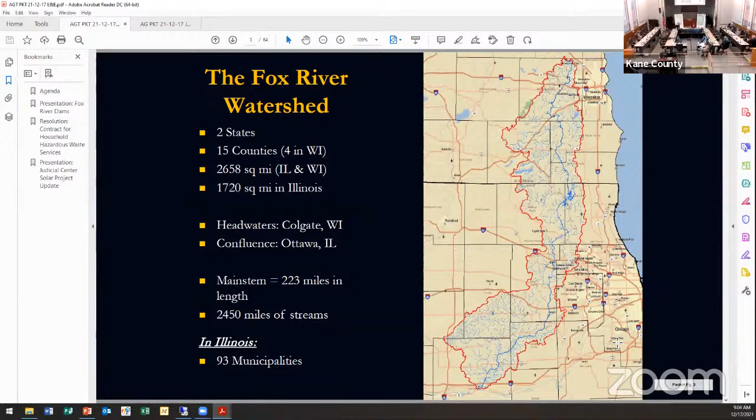When we talk about the people in the watershed, there's a vast amount of jurisdictions that span across the watershed. We have 93 municipalities just within Illinois alone. Is there another Fox River in Wisconsin? There is, up by Green Bay. We don't like to talk about it.

Appleton, that's up by Appleton. That's correct, and it drains up north through Green Bay.

So our Fox River here drains south from Colgate, Wisconsin, just west or northwest of the Milwaukee area, down about 200 miles through Illinois, and has its confluence with the Illinois River just upstream of Starved Rock down in Ottawa.

When we talk about the river and its dams, it's important to understand some of the history. If we zoom in on Kane County, in the late 1830s, early settlers and pioneers making their way westward from Chicago toward Galena and the Mississippi River had to cross the Fox River Valley.

Many people noted the great conditions of this steep, gravelly, bedrock-lined river and the abundant timber along the Fox River Valley, and noted it would be a perfect place to set up shop, to construct sawmills and other operations.

The county quickly grew. As you can see, in 1840 the population was about 6,500. Now on the map on the right, the little black dots along the river itself are the dams that were constructed early on by those early settlers.

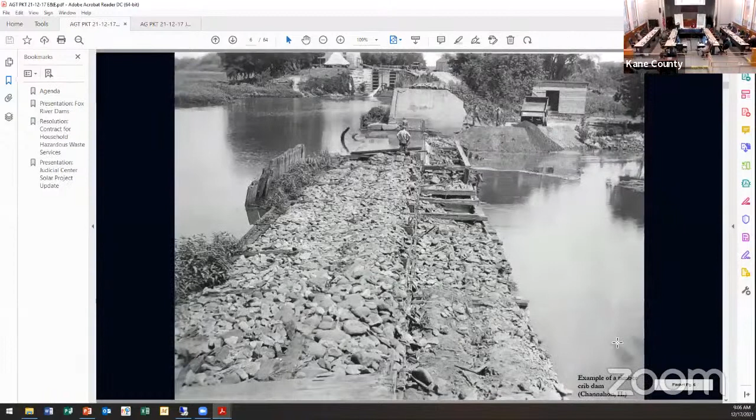Those early dams were constructed from timber and stone cribbing. This is an example of what they would have looked like. These dams were frequently washed out.

The early ones that were put in, if you look at Kane County's history, there are many notes of dams being constructed and then washed out by what they refer to as a spring freshet. So early on, the dams were continually maintained and rebuilt, constructed upstream and downstream of the former site when one was washed out from one year to the next.

But then, when the railroads came through in 1849, that really put the development into overdrive. With that, the population grew, and there was a lot more industry along the rivers. The dams themselves, as technology increased, were reconstructed.

Instead of using timber crib construction, they were built with things like concrete, and that's what we see on all of the dams that we have today.

The Fox River itself was utilized for a number of things besides mechanical water power to grind flour, for sawmills, and things like that.

The Fox River, interestingly enough, was one of the primary sources of ice for the city of Chicago in the late 1800s. About 120,000 tons could be stored up in the Elgin ice houses alone, in addition to ones upstream and downstream.

There's a picture of one — I couldn't find one for Elgin, but I did find one picture of an ice house down in Oswego, so it gives you an idea of what those might have looked like.

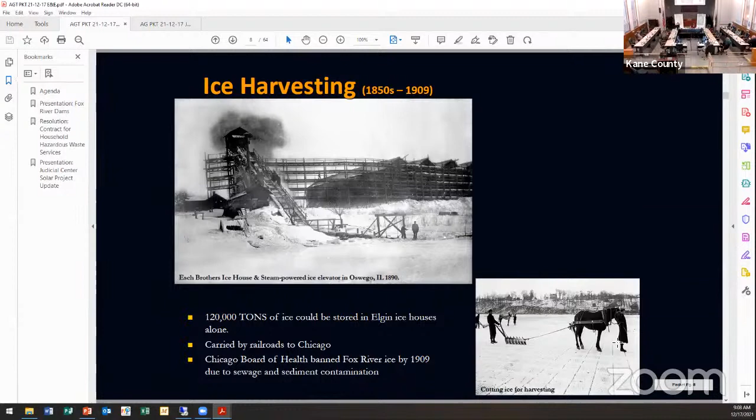Another interesting part of Fox River history is that before the advent of plastics, mussels were harvested out of the Fox River, particularly in the southern part, and used for buttons. Many industries opened up in the south part of the river, and they would harvest these mussels by taking john boats out, dragging lines across the mussels. As the mussels closed up, they'd pull them in, then run them through a machine that would punch holes in them.

I actually have one here after the meeting if anybody wants to see one. They're kind of hard to find, but if you look in the right place in the Fox River Watershed, particularly down in the Yorkville area, you'll actually find a couple of these. So they're kind of interesting.

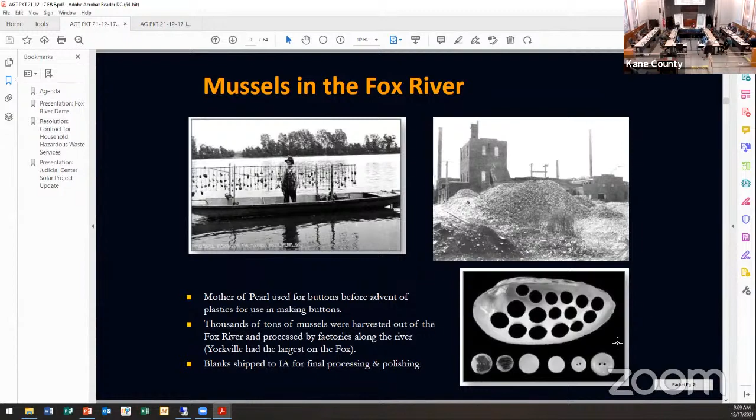So again, it was another industry that sprang up and utilized the Fox River during that time period. As time went on, we had better products, plastics came in, and that was no longer used. So it's kind of an ongoing theme.

We had all of this development occurring along the Fox River from the late 1800s through the 1930s. It wasn't until 1899 that the Rivers and Harbors Act was passed, the first federal legislation that put laws in place. Prior to that, people could just go out—if a landowner next to the river wanted to build a dam, he just built one. If he wanted to fill in part of the river for better access, he just did it. In 1899 that changed; federal laws were established.

With the added development and increased population, there were no standards for water pollution. It wasn't until the 1920s that people noticed the condition of the river was so bad that they started building wastewater treatment plants. That's when many of our treatment plants up and down the Fox River were constructed. You can see some other notes there.

PCBs were used as electricity became more prevalent in the area. PCBs were used in that process with the transformers, and that became a pollutant discharged into the river. We still deal with PCBs today in some of the sediments.

The first water pollution legislation was in 1948. Then everybody's familiar with the 1972 Clean Water Act, those amendments made to the Federal Water Pollution Control Act to further clean up the river. What we saw in the Fox River was that water quality was very poor up until the Clean Water Act, and then it got dramatically better.

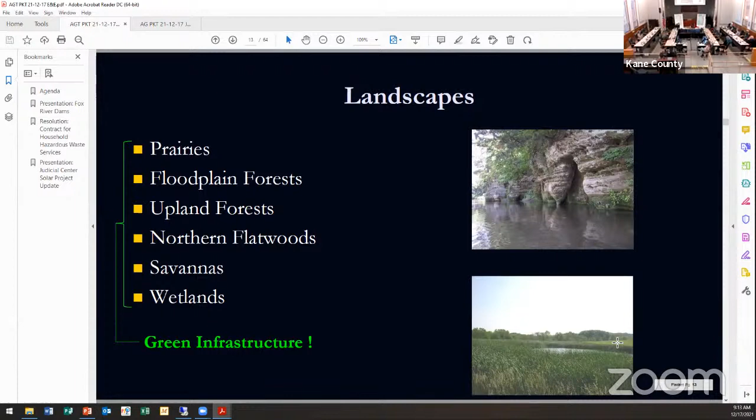As all of you are aware, the county has a green infrastructure plan that recognizes green infrastructure as the interconnected network of these natural areas, which really provides the reserve for our county's biodiversity. It's a really important land asset that we need to actively manage. So is 12% a good number or not good enough?

Well, it's very low, but it's just a consequence of how the county in northern Illinois was settled and converted from wetland and prairie landscape to agricultural production. So I think what it highlights is that it's very important that we protect the natural resources, those features that we have left.

For example, in Kane County, we have about 3,600 acres of wetlands left in the county. That's out of the county itself, which is 335,000 acres. So that's about 1%. Only about 1% of the county is wetlands.

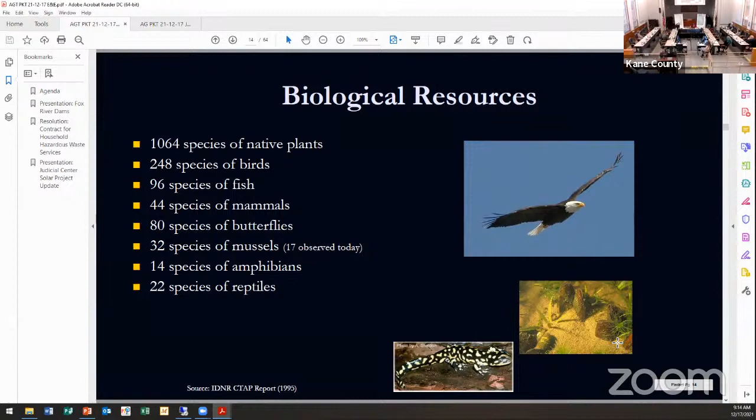And so when we talk about these biological resources, 1,000 species of native plants, 250 species of birds, almost 100 species of fish, et cetera, the majority of these flora and fauna rely on that 12% of the remaining natural areas that we have. And of course, within there, we have a number of state threatened and endangered species.

And so those are something that we use in order to try to take extra caution in protecting those remaining wetlands and the rivers and streams.

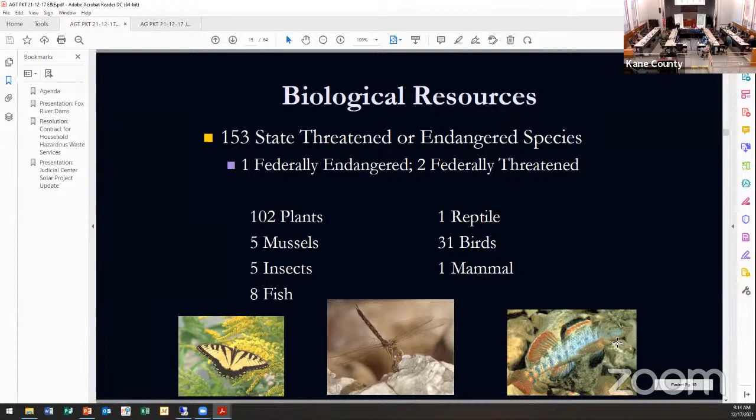So which one is federally endangered? The turtle? I knew you were going to ask me that. Blanding's turtle. Eastern prairie fringed orchid is one of the federally protected plants. There's only a few that are at the federal level. There's many state ones, and I don't have those offhand. Okay, all right, thank you.

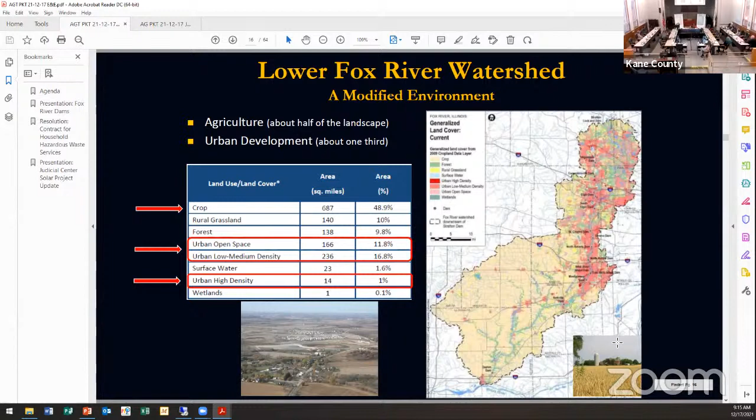So we talked about the 12% of the watershed that is remaining in those natural areas. About 50% of the watershed is agricultural row crops, and then about a third of the watershed is urban development. So those would be our subdivisions, our strip malls, our downtown areas, et cetera.

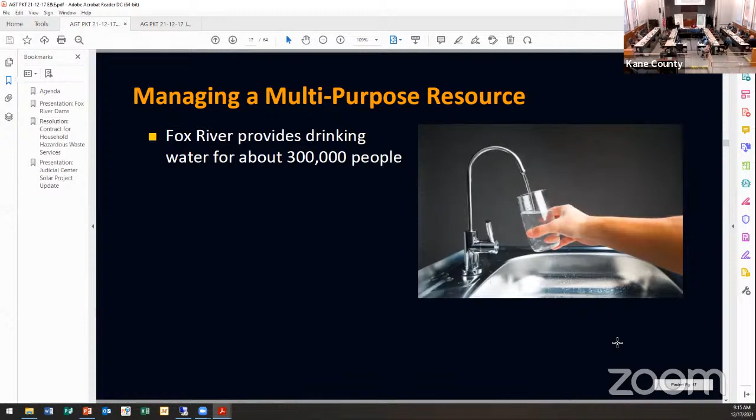And with that development and the people that live in those areas, we rely on the Fox River to provide a number of services for us. I think the first thing that comes to mind is that the Fox River provides drinking water for a little more than 300,000 people. City of Elgin and City of Aurora take their drinking water, a large portion of it, from the Fox River. And so they rely on the clean water in the river for their water supplies.

Likewise, all of the people in the watershed discharge their stormwater. When it rains, the water washes off their landscape, goes into the ditches and swales, and then ultimately into the tributaries, and finally into the Fox River. So we rely on the Fox River to carry, assimilate, and treat our stormwater.

Likewise, all of the wastewater that's discharged from all of our municipal treatment plants is discharged into the Fox River. And you can see some of the numbers there. When you look at the total number of permitted discharges, there's about 160 permitted discharges that the IEPA has issued a permit to discharge some amount of water into the Fox River.

When you add all of that up and you look at what the projected base flow is in the Fox River under low flow conditions, the amount of water that is allowed to be technically discharged into the river actually exceeds the low flow natural flow in the river.

So what that tells us is that when we get to extreme low flow conditions in the Fox River, the vast majority of that flow is actually made up of treated discharges coming from further upstream in the watershed. So how we treat that wastewater discharged into the river becomes very, very important.

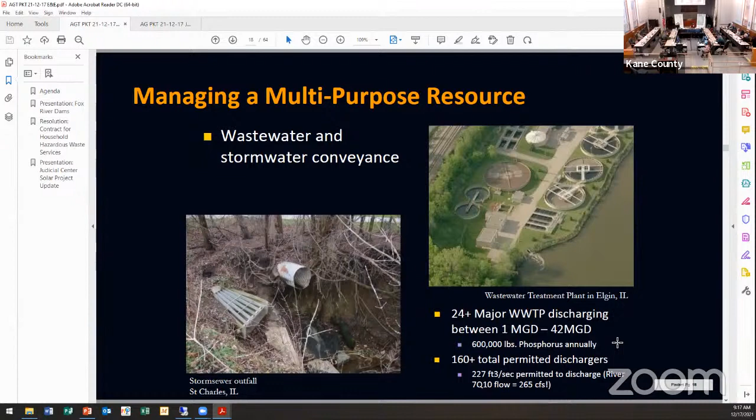Rob, Madam Chair, could I ask a question? Please. I had been told at one time that during extreme low flow, the amount of effluent in the river is about 82% of what's actually in the river. Is that an accurate number?

It's probably not far off. Again, part of it gets back to what's permitted to discharge versus what's actually discharged. So if you think about it, during a drought condition, the treatment plants have a permit and they're allowed to discharge at a certain level, but under drought conditions, they're discharging much lower than that. So that number is probably not too far off. I don't know if anybody's actually crunched the hard numbers, but it does present a challenge. We'll get to how those things play into how the river's been managed in terms of the dam. So that definitely plays into that.

In addition to that, follow up if I might, Madam Chair. Yes, please. I wanted to ask about the opposite situation. I know in Chicago, oftentimes, at least in the past, if there were heavy rains and so forth, they would have to reverse the flow of the Chicago River.

And when stuff got into Lake Michigan, they would close the beaches.

If we've got a spring freshet or a heavy summer rain, does that result in telling the people who have permitted discharge that they have to reduce it? Or how does that affect Elgin or the drinking water if there's too much of the wrong kind of water flowing in?

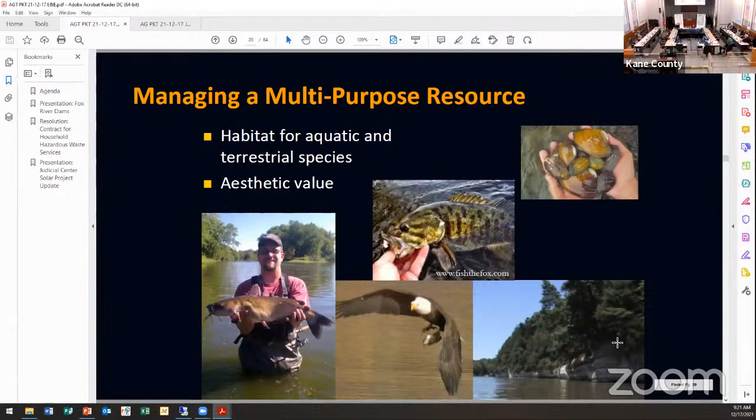Again, we're asking the Fox River to meet a lot of demands with our drinking water withdrawals, our wastewater discharges, our stormwater discharges, all while asking it to be a viable source for the remaining biodiversity that we have in the watershed. So these are just a couple of pictures to remind everybody of the valuable resources that we do have within the Fox River itself.

And things are changing. In the Fox River, the population is projected to continue to increase. We know that there's over 1.25 million people in the watershed, including the area up in Wisconsin, and we think that's quickly going to reach 1.5 million people. With all of those people living and working in the watershed and utilizing the river, whether for stormwater or wastewater, those are challenges we're going to have to work hard on in order to maintain the level of quality in the river.

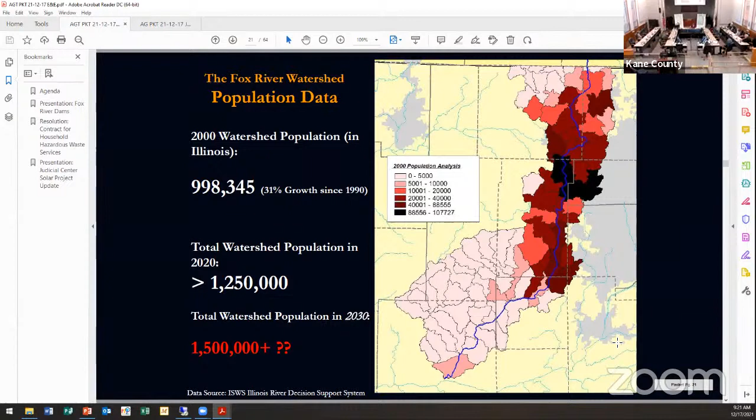So the state of Illinois, through the IEPA, as set forth by the Clean Water Act, has to prepare a report every other year called the 305(b) report. They look at the conditions in the Fox River and assess whether it's meeting the standards. If it doesn't meet the standards, they put out what's called a 303(d) list, which lists the impairments, or essentially the problems, with the individual stream or river systems.

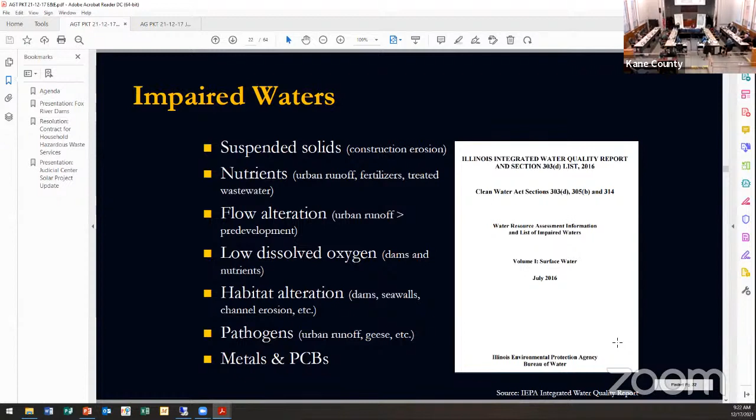Some of the active impairments that we're actively trying to address right now, or focusing on, would be nutrients and low dissolved oxygen.

When they go out and do their sampling, they look at the water quality, the macroinvertebrates—the little bugs that live in the river system—and sample the fish, putting together this composite assessment to identify what they believe the problems are. The low dissolved oxygen, caused by excess nutrients in the river system, always tends to come to the top of the list as one of the primary problems.

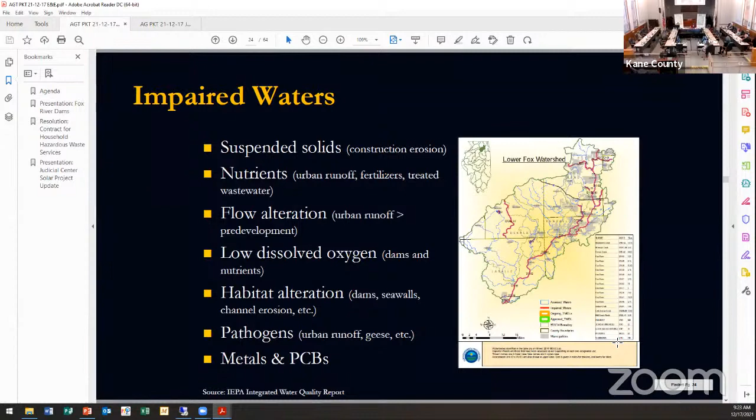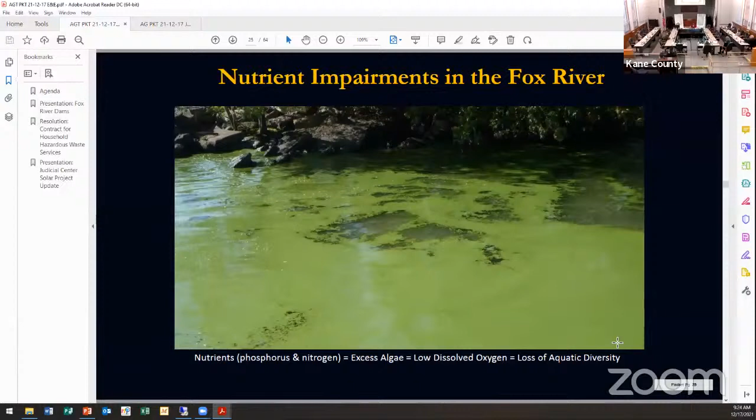These nutrients are discharged into the river 24/7 from wastewater treatment plants, as well as what washes off periodically during storm events. When those nutrients wash into the river system, the algae gives off oxygen during the day when the sun is shining, but when the sun goes down, they're respiring and consuming oxygen. They can actually pull oxygen out of the water, which stresses the fish and macroinvertebrates.

That 47%, nearly half of the river, is in an impounded condition rather than free-flowing. And when you look at the surface area from an aerial map, about 55% of the area of the river is actually within these dam impoundments. That has a significant impact on the water quality in the Fox River.

So focusing in a bit more on the dams: below the dams we have free-flowing segments with high biodiversity because of variability in velocity and depth. Since the water moves swiftly around cobbles and gravels, we get higher dissolved oxygen. The nutrients in the stream system are distributed across the entire bottom of the river, and with higher biodiversity—diatoms, bacteria, macroinvertebrates, all the little bugs living in the river—they do a pretty good job of consuming and assimilating those nutrients.

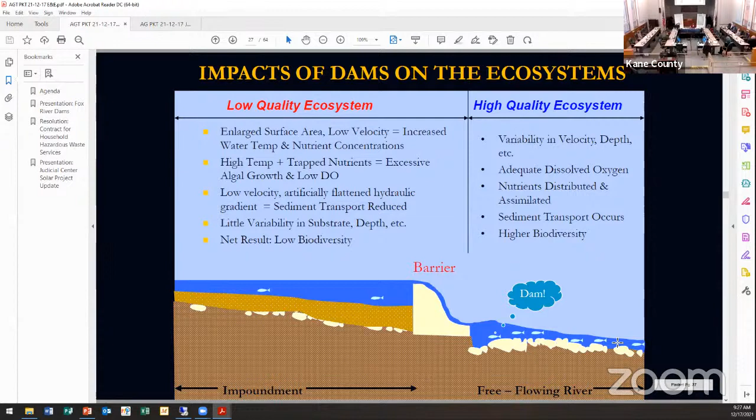So we know that they definitely have an impact on the ecosystem, but we also know that they have an impact on the water quality. If we think about it, it makes sense - we said that 50-55% of the entire river from north to south is in this impounded condition. It should be no surprise that creates significant challenges in trying to meet the water quality standards, basically trying to keep that dissolved oxygen high enough to support the diversity in the river.

In addition to those chemical and biological impacts of the dams, everybody's probably aware of the safety challenges we have with the dams in terms of public safety. That's because the dams themselves were constructed by people like me a long time ago, people like Jody, engineers. We want to be very efficient in how we're going to discharge that water. They designed those so that they wouldn't scour out below the dam and cause the dam to fail.

So they constructed these stilling basins below the dams. You may have heard them referred to as a roller, and essentially it's a way to dissipate the energy there. It's very efficient at dissipating the energy, but the problem is they create a keeper system that if anybody gets near that, they could get sucked into it, and it usually ends in a fatality.

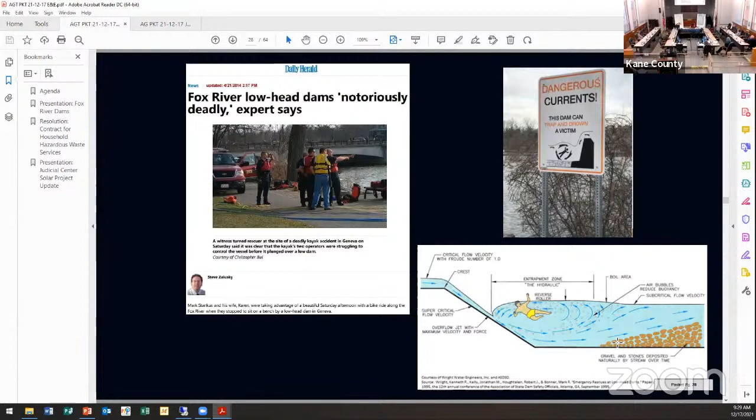We've had a number of fatalities, thankfully none recently that I'm aware of here in the Fox River. There's been a number of fatalities on the Kankakee River in Wilmington, for example. We had some fatalities many years ago in Yorkville, and that drove the process to retrofitting the dam there. So besides the water quality and biological impacts of the dam, public safety is certainly something else that needs to be considered.

So just a couple of slides - we talk about all of these different problems, and of course there's never a simple answer as to why these things happened. Likewise, there's never a simple answer that there's a one size fits all - we should just do this and everything would be fine. Everybody tends to work in their own silo in their own area, and the challenge is that if we're not really talking with one another and coordinating, collaborating, we can have these larger problems that manifest, such as what we see in the Fox River with the ongoing water quality issues.

The good news is that we've kind of gotten out of those silos of late, and people have been working together. So we're going to talk about that.

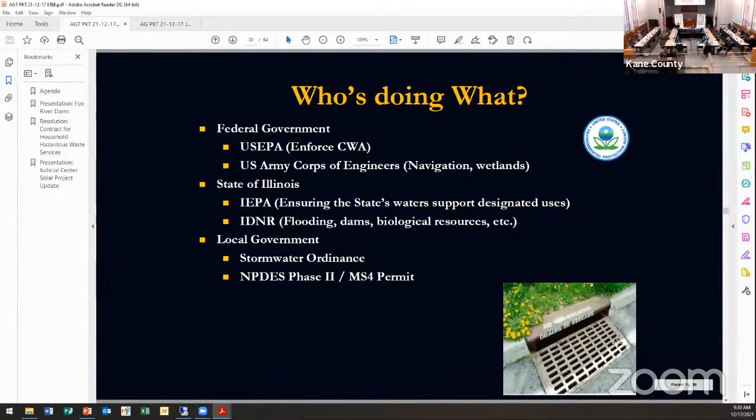Of course, there's a number of agencies that are working on these issues. Again, this is where we have a challenge - we want to make sure everybody's not just working within their own silo between the EPA and the Army Corps of Engineers. We're looking at the Clean Water Act versus wetlands, the IDNR on dams and flooding, local governments like Kane County or municipalities looking at their stormwater ordinance, and the NPDES looking at the water quality aspects of stormwater. We need to make sure everybody's working together.

So moving forward and the future of the Fox River - we really are at a crossroads here. I think the county's done an excellent job trying to forecast out and get ahead of some of these things. For example, the county's stormwater management ordinance and the aspects put in place there to keep the rainwater as close to where it falls as we can, preserving the green infrastructure - those remaining wetlands and things like that - promoting water quality BMPs to clean that water.

So we call that site scale green infrastructure - those best management practices that we're asking folks that are developing to construct, to infiltrate and clean their water. Then when we think about the bigger picture in terms of the Fox River, it's important to look at what improvements can be made to the water quality of the point source discharges, as well as looking again at the dams themselves and recognizing the impacts they have on the river itself.

Working together with multiple jurisdictions, multiple agencies, we're able to move that process forward. One of those aspects is this group called the Fox River Study Group, of which Kane County is a board member. It's existed for about 20 years.

The Fox River Study Group has been looking at what the problems are within the Fox River and what can be done to address those, and where we can get the most bang for our buck. There was an interim report published in 2015, and we have a new report that's going to be submitted to the IEPA in December 2022. Our findings so far have shown there's a combination of recommendations and improvements that need to be made.

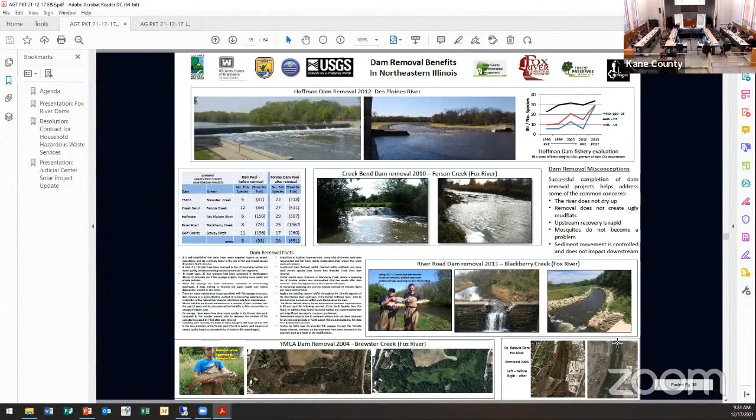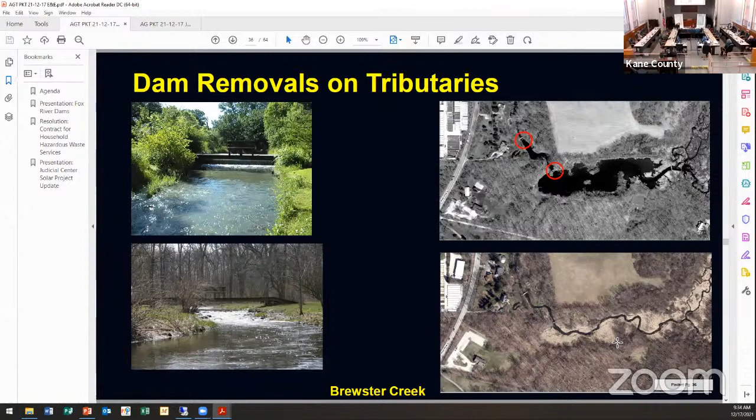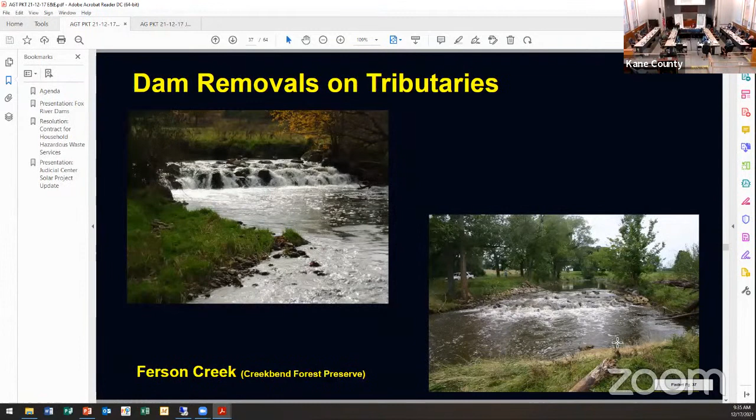But we've had several dams removed on the tributaries of the Fox River, particularly here in Kane County. For example, Kane County Forest Preserve worked on removal of the dam at Camp Tu-Endie-Wei on Brewster Creek. There's been a dam removal at Creek Bend Forest Preserve on Ferson Creek. A couple of smaller dams were removed on Tyler Creek - one was up in Judson University, and another smaller one was removed in Wing Park up in the city of Elgin.

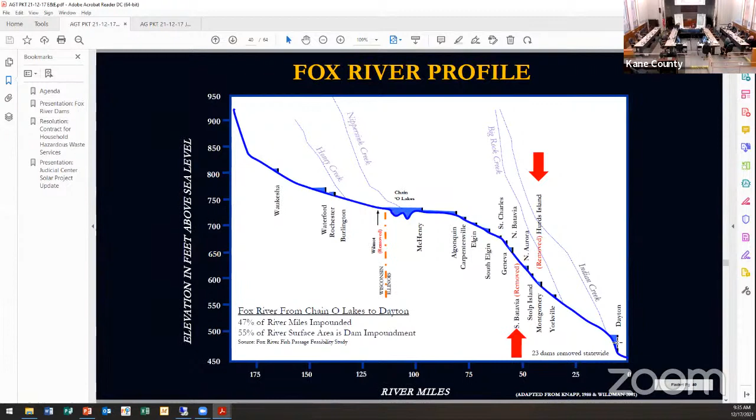So the South Batavia Dam was removed in 2005 by the Kane County Forest Preserve - that was about a $1.5 million project. You can see the before and after; there's really not a lot of changes, but if you look at the aerials on the right, the spillways were removed. This dam was interesting in the sense that it was actually constructed even though the Rivers and Harbors Act of 1899 existed - it was built in the very early 1900s.

There was a powerhouse located where Funway was, and that powerhouse provided the electrical energy for the old interurban line there. As the story goes, one summer the river was so low that the powerhouse didn't have enough cooling water, so they had to shut their generators down.

And some of the dignitaries on the 4th of July were stuck on this interurban line and were not very happy. Lo and behold, the very next year, the dam was constructed adjacent to the powerhouse so that the water level would never be too low. So it's kind of interesting, things were done a little quickly back then. But of course, once the interurban line shut down, the dam became derelict and didn't serve any purpose. That's why the Forest Preserve looked at removing it in 2005.

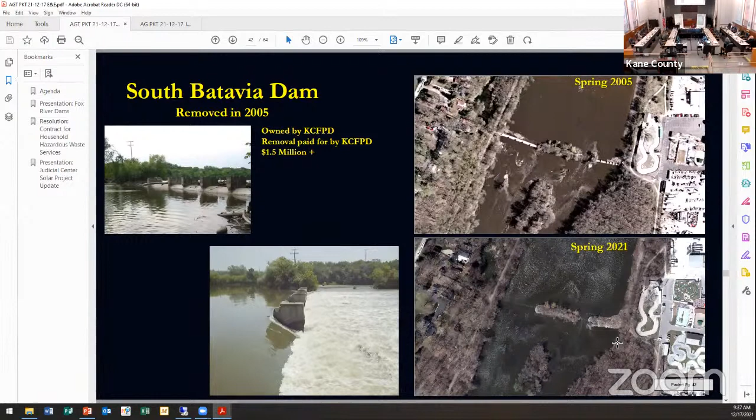Likewise, the North Avenue Dam at the south end of Aurora was removed in 2006 by the city of Aurora. Interestingly, that dam was actually constructed in the 1950s, I believe. And the sole purpose of that dam—there was no historical dam there for like a mill or anything.

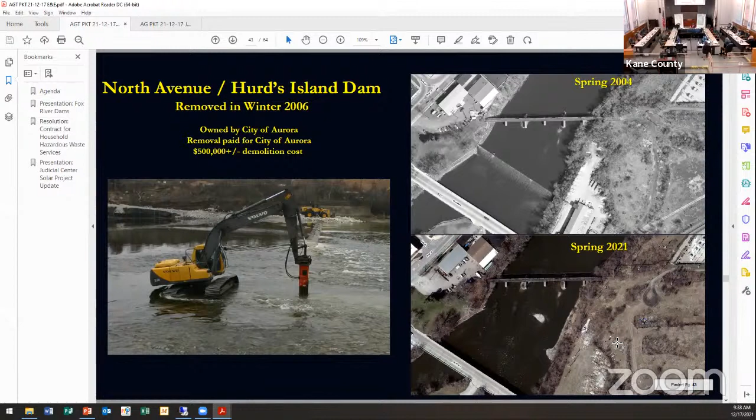Records are sketchy, but the story is that we all know the city of Aurora had combined sewer overflow. So when it would rain, the sewers would overflow and go into the river, creating a rather noxious condition during certain times of the year, with things hung up on the sides of the riverbanks. It became such an issue that in the 1950s they decided to build a dam to raise the water level, to drown out those areas and keep things flowing through. With improvements in treatment and reduction in combined sewer overflows, the dam wasn't needed anymore, so the city of Aurora removed it in 2006.

The Yorkville Dam was a dam modification project done by the Illinois Department of Natural Resources. This project was about a $7 million project. They wanted to address the safety aspect of the dam itself, so they removed the dam and built a step dam in its place.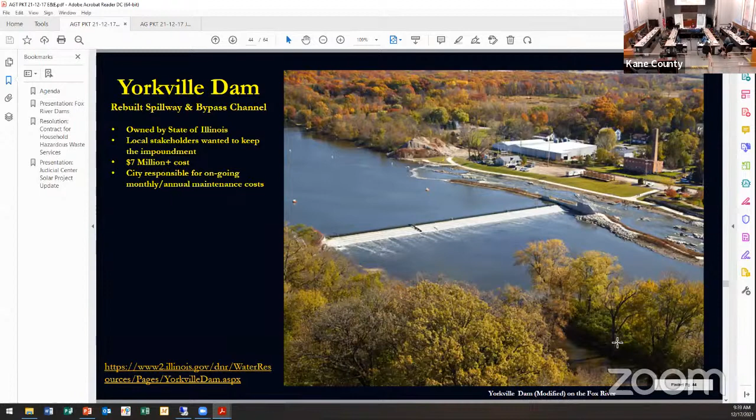The city of Yorkville's constituents were very adamant that they didn't want to lose their dam impoundment, so they opted to build this whitewater bypass channel, shown on the right side of that photo. This is an option, although the interesting thing is, if you recall the slide that showed no fish on the dam side and all the fish and diversity on the other side—dam modification projects don't address any of the water quality issues, and they address very few of the biological issues in terms of fish passage and biodiversity.

Excuse me, Wallace with the question. Yes—I know St. Charles has proposed a similar dam to what Yorkville had. They're taking out the dam and putting in a step sort of dam for recreational whitewater use. Have you looked at that project, and do you know if it's going forward and what the impact would be? Yes, I actually have slides on that. Okay, I can skip through. No, that's okay—let me go through a couple other ones, then we'll touch on that, and I know I need to turn this over.

I think everybody's familiar with the Kane County Forest Preserve project to remove the Carpenter Dam up in Carpentersville. That project is ongoing, about a $1.5 million project, slated for removal in the fall of 2022. It's funded through the IDNR, Office of Water Resources. I've been coordinating with the Forest Preserve District on that. The Fox River Study Group has spent considerable time and money doing pre-project monitoring, with the intent of doing post-project monitoring of the mussels, fish, and water quality, so we have good baseline data on this dam removal project—one of the larger dams to be removed, certainly larger than the South Batavia and North Avenue dams.

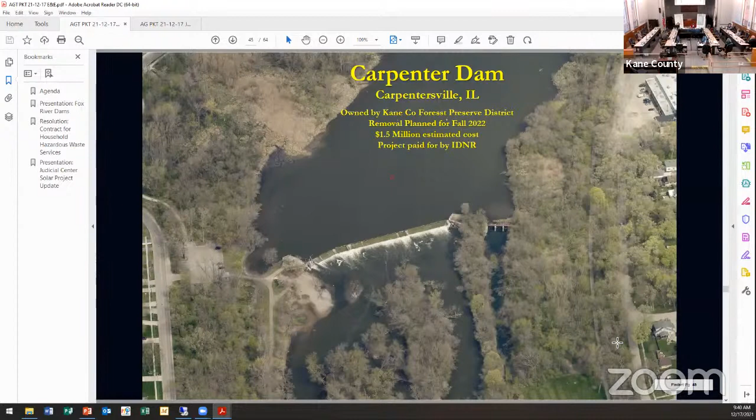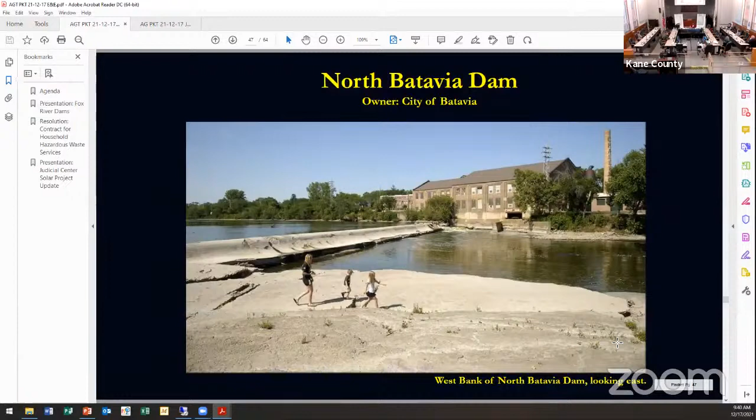I'll skip past that. The city of Batavia is also looking at either removing or modifying their dam. This is a picture of the dam under low flow conditions—you can see the dam weir itself is completely exposed, because there's a large breach on the east side of the channel. So in all but the larger flows in the river, at base flow conditions, the water does not go over the dam; it actually goes around it.

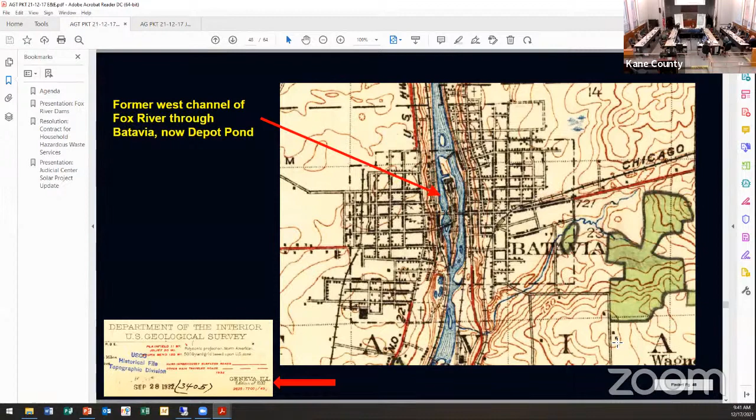If you look at the 1932 topographic map of the city of Batavia, you can see that the river actually flowed on both sides of the main part of downtown Batavia where city hall is, and that was filled in over time. The dam was constructed to provide mechanical water power, and as that was no longer needed, the industries moved away. It's an interesting tidbit of what that area looked like and how it was modified. Now we have the Depot Pond, and we can see the remnants of that.

They're at the concept stage now, doing preliminary cost estimates, and I don't believe they've actually voted yet on whether to remove or modify the dam. The DNR is heavily involved in this, and they've said they would fund removal of the dam, but wouldn't fund replacing it with any new structure, because they recognize the issues still created by impacting water quality, fish passage, et cetera.

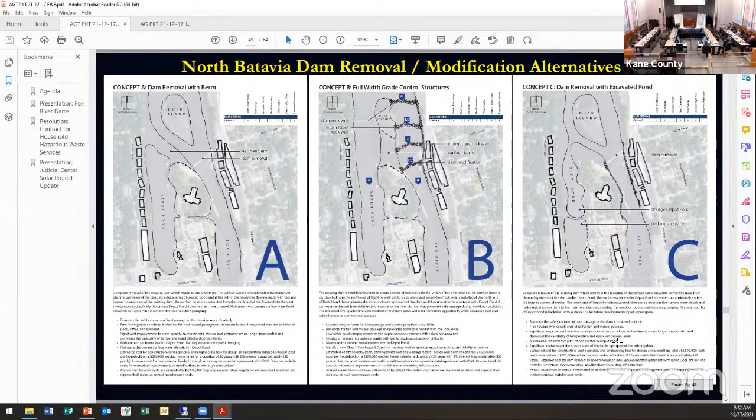There's a number of different alternatives they're considering. I put these in the slideshow so you can look at them. I don't have time to go through all of them now, but they range anywhere from $4.5 million up to $13 million, depending on whether they replace the dam or do a simple removal. A lot of even that $4.5 million cost is driven by how they address preserving or modifying the Depot Pond area, which has a lot of interested parties, adjacent landowners and things like that. That's a complicating factor. I think removing the dam itself would be less than half of that if the Depot Pond isn't factored in.

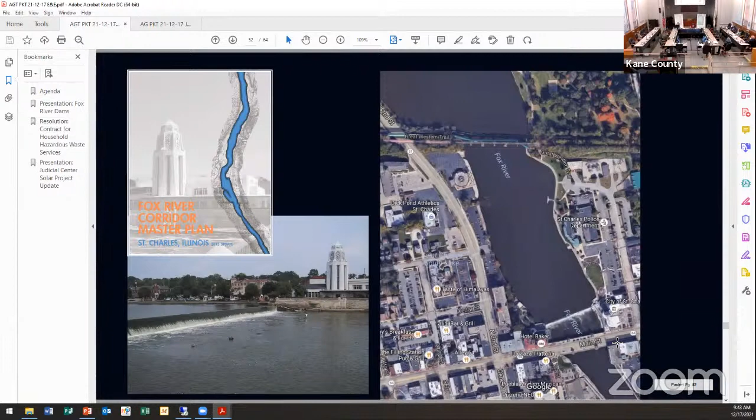You had asked about the city of St. Charles. They put together their Fox River Corridor Master Plan a number of years ago. I believe they're actively looking for funding sources to construct their proposed modification. This is the concept plan as they've laid it out. As you mentioned, it basically preserves the upstream impoundment, recognizing there's a large recreational boating constituency upstream of the St. Charles Dam. So they want to preserve that, but they're looking for a way to allow fish to move upstream and paddlers to move safely downstream.

This is something they're looking at doing. Again, it doesn't really address the water quality aspects, but it addresses a little bit of the fisheries aspect. It'll be interesting to see how this project, if it moves forward, proceeds through permitting with the Army Corps of Engineers, et cetera. So that's three dams right there? Well, technically it's one long dam structure. It goes from Main Street all the way up to the old Chicago Great Western Railroad Bridge by Salerno's, but there's basically three large rock structures, so they're stepping it down.

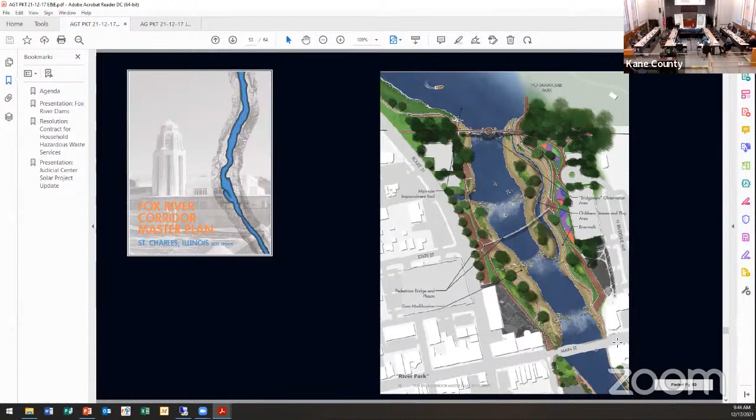This is a proposal, just a concept plan they've been working with. There's another example, the artist's conception of what that may look like. This project would be many millions of dollars, which is why they're actively looking at other funding sources and opportunities.

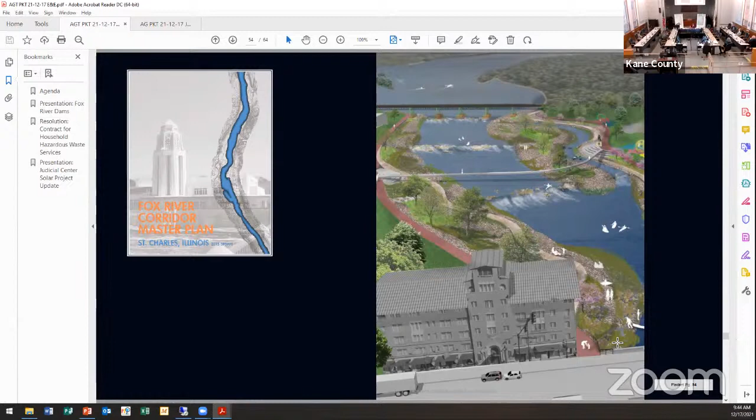They're looking at it as a way to perhaps spark economic development and revenue in downtown St. Charles. The state of Illinois put together a report, and you can see the numbers listed out for the actual removal cost. This gives us a good snapshot of what pure removal would cost on any of these, and you can contrast these to projected numbers for addressing other issues like the Depot Pond or a stepped modification structure in St. Charles.

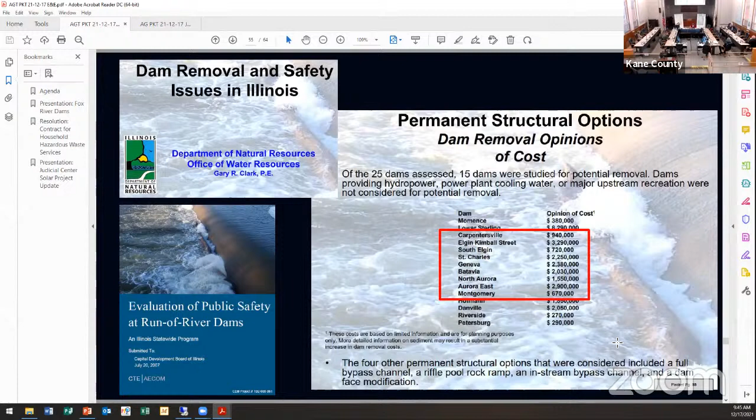In summary, we rely on the Fox River to provide a whole host of services for the members, municipalities, and those who live and work in the watershed. There are many ongoing challenges, and we're continuing to work through those. It's very important that everybody has open dialogues about these and understands all the challenges we face, because once the resource is gone, it's really hard to get it back.

Are the fish edible in the Fox River? That's kind of a loaded question, I guess. It depends upon how loaded.

There is a fish consumption advisory for fish in the Fox River. Typically, the larger and older the fish, the longer they've been feeding on smaller fish and macroinvertebrates on the bottom, so they tend to bioaccumulate other toxins like mercury. We're not discharging mercury into the Fox River - believe it or not, it's actually coming from atmospheric deposition out of the sky, but it tends to accumulate in our waterways and in the tissues.